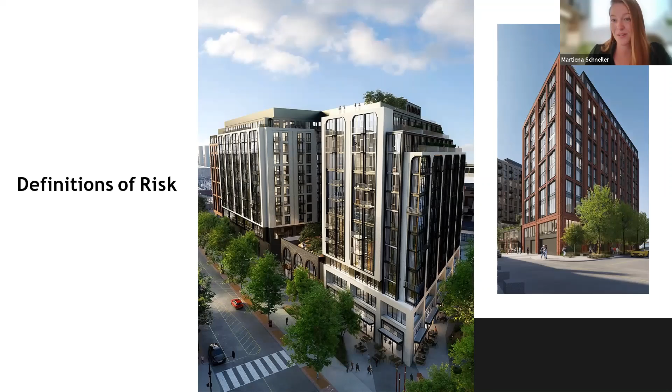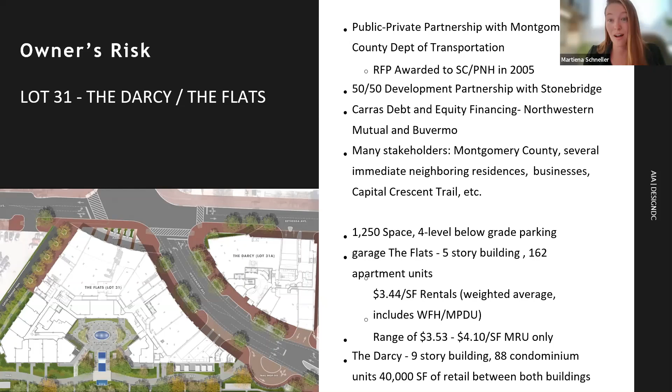So risk. Good developers learn to be risk conscious rather than risk averse. And it is not, there we go. Which brings us to Lot 31, which is the first project that I worked on when I came over to Hoffman and Associates. It was a public-private partnership with Montgomery County that was awarded to us in 2005 and went through design and looked a little bit different than what you know it as today, which ended up being the 1,200 space garage with the apartments and the condos. It was originally designed as a 250 unit condo building, which was going to serve as the gateway to Bethesda.

This all sounds great. We thought we were on top of it. Flash forward to when our designs were ready and we were about to bid, and what should happen? But the 2008 recession. We thought that it was not a great time to move forward with that many condos onto the market in 2008. So the overall decision between our joint venture was to put the project on hold and completely redesign. As you can imagine, this is more time, more risk coming into it, but no one was comfortable bringing that many units to the market.

So the big things that we looked at when we went back and revamped the project were getting rid of one of the condo buildings entirely. So we kept the Darcy, which turned into 88 condo units, and made the Flats 162 apartments. But that was the easy part of the redesign. There were also codes that were changing. Energy Star was coming online. Lighting design was changing. We spec'd lighting fixtures 6 times for this project. We thought that we were ahead of the game and had gotten the right package together with our compact fluorescents.

And we were joking earlier today, LED lights were just starting to become a thing. We stretched and scraped the budget just to get LED lights in the common spaces. So it's amazing how far the market has transitioned since that time.

Other things that we had to work on were our envelope. We had to redo the blower door test and rerun energy models. You can see some pictures here of construction. It was a very large hole that was very close to the neighborhood. There were a lot of eyes on it. We ended up breaking ground in 2012. So it was a hurry up and wait situation to get the drawings pulled together.

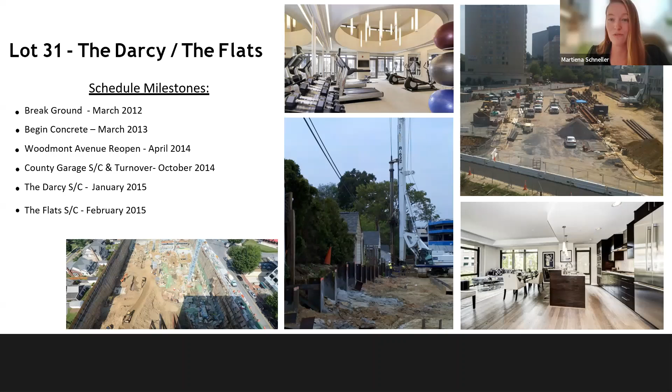And so when we had our GMP, it didn't include 4 massive addendums that were to come later, which included new updates to codes, including NFPA 285. Now, NFPA 285 wasn't new on the code books. It was just starting to be enforced. It'd come to the forefront of everyone's mind.

And so we went through a massive redesign on the exterior facade of this building to change the insulation from rigid to mineral wool, which changed the depth, changed our stud cavity and the thickness of the studs. And it was a pretty massive overall design change to the entire project.

This is us mid-construction, just as we were getting our substantial completions. And you can see the marketing sign says dramatically different. And I thought that that was a nice note to this, because where the project started to 10 years later, when it actually came online, it was dramatically different in all things.

So now that's my story from the development risk side. I'm going to turn it over to Adam so he can tell us a little bit about where the architect sees risk. Thank you, Martiena.

So one of the biggest risks that designers can face is having to redesign projects due to changing regulations or misinterpretation of current regulations that one is unfamiliar with. Clients and owners are often reluctant to pay costly add services related to code requirements, as they rely on us professionals to stay abreast of the latest rules.

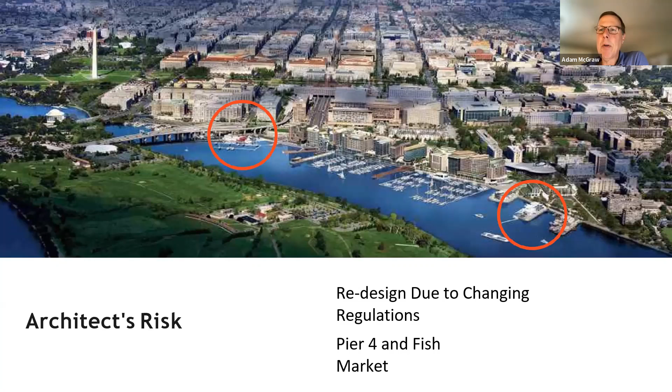So we're going to look at some case studies at the DC Wharf where we looked at mitigating environmental risk at both the Fish Market and Pier 4 projects. So next slide.

So while Hoffman had been working for years down at the wharf on phase 1, all of their new buildings had been located with their ground floors above the 100-year floodplain. And so they thus far avoided floodproofing design and the requirements for floodproofing barriers.

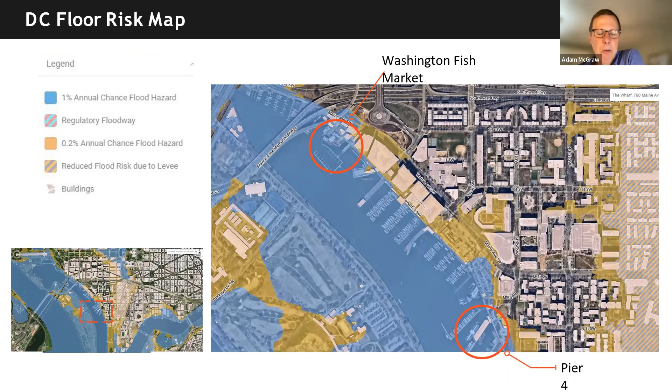When we began to design the Washington Fish Market and the Pier 4 projects, they were located on existing fixed sites that were within the 100-year floodplain, shown in blue here on this slide. So therefore, we knew we were going to have to familiarize ourselves with all the requirements of floodproofing regulations.

So again, we got to understand NFIP, which is the National Flood Insurance Program. It's required for all buildings located within floodplains, which also led us to need to understand FEMA guidelines, which show you how to achieve floodproofing certificates, which are again required for buildings which are going to be located in these areas.

We also had to get familiar with ASCE 24, which is the American Society of Civil Engineers, Chapter 24, which has design regulations and details for designing in these hazardous areas. And then all of these regulations in the city of Washington flow through the DC Department of Energy and Environment. So we met multiple times with DOEE to discuss our floodproofing designs and work with them to achieve approvable concepts.

We also reached out to manufacturers of flood barriers. And over on the right, you can see the left-hand barrier is what's called AquaFence, and the right-hand barrier is what's called Presray. And these are some of the major certified floodproofing barriers available on the market today.

And we needed to understand how those barriers worked early on, as early as the concept and schematic design. So we knew how they were going to work with our buildings and how we were going to need to incorporate those into our details.

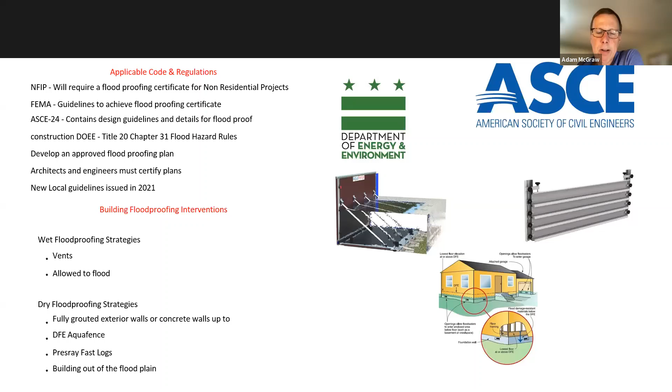During the course of the design of these two projects, DOEE issued a document called Climate Ready DC, which you can see highlights the dangers of rising tides and flooding to the Washington, DC area. I think everyone knows that over the past couple decades more and more attention has been paid to these flood events, including the 2006 Federal Triangle interior flood of DC, the 2011 flood of the Georgetown Harbor, where they actually had flood-proofing gates but did not put them up, which was quite the debacle. And then also the devastation that Hurricane Sandy brought to New York City, flooding the subway.

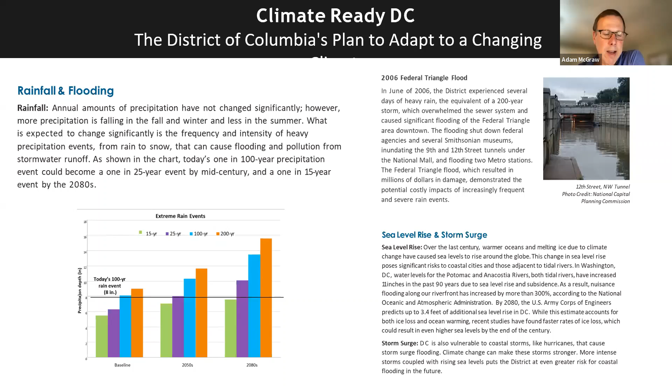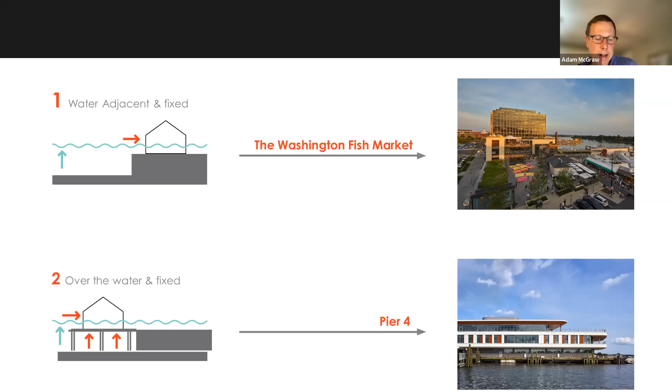Next slide. So these two projects presented unique, different flood-proofing challenges. The Washington Fish Market is located next to the water and on a large amount of fill. So it's subject to both lateral flood forces as well as moisture infiltration from below, whereas Pier 4 was projected out over top of the water and subject to lateral forces as well as hydrostatic pressure and uplift. Next slide.

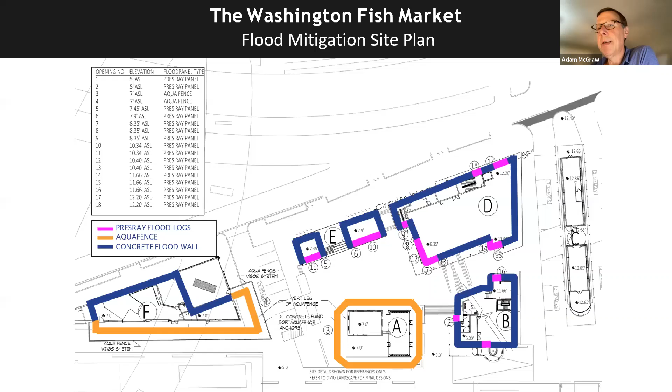So again, at the earliest phases of design, we were working with DOEE on developing floodproofing strategies that were mixtures of, in blue, floodproofing construction, which is fully grouted masonry walls, structures that are impervious to water. And then in yellow, what we're showing are AquaFence barriers, which you can put up when you have storefront or glazing on buildings, so you can protect around window and door openings. And then in purple, what are called Presray fast logs, which are adhered directly to the building, which can also protect openings. Next slide.

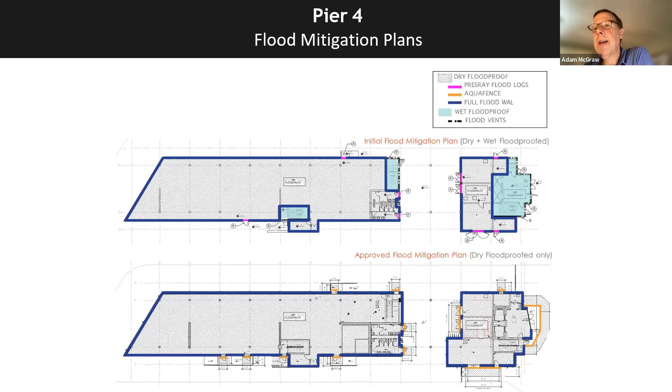And here are our floodproofing plans that we worked on with DOEE for Pier 4. The above plan was one of our earlier drafts that we proposed. We had proposed what was called wet floodproofing, shown in light blue, which is allowing certain areas of the building to flood, while everything else was dry floodproofed, keeping the floodwaters out. At the end of the day, we went with all dry floodproofing to protect the entire building. DOEE felt like wet floodproofing, particularly the lobby, could lead to extensive repair costs.

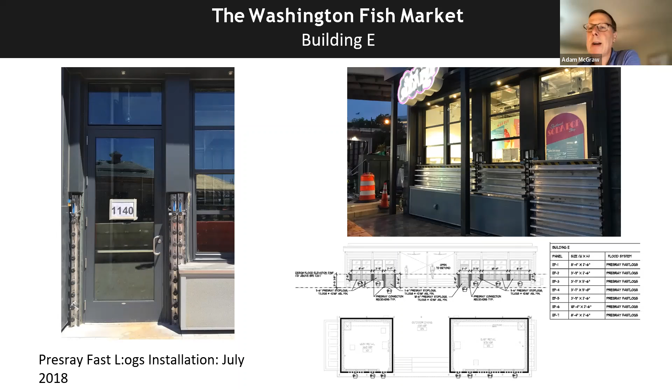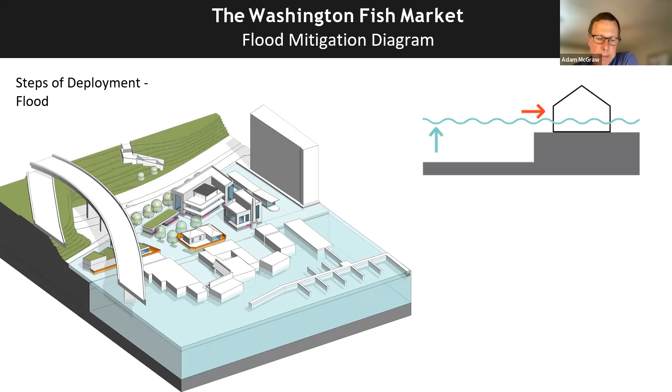So by the time we were engineering these systems and working with our structural, civil, and MEP engineers and developing our most expensive products, which were our permit and construction documents, we had floodproofing designs developed which were both workable and understood by the regulatory agencies, and which ended up being approved and built without extensive permit comments or any costly redesign. Great. So again, how to mitigate risk through working with regulatory agencies early on in the design process.

Which leads us to our last leg of the stool, which is the contractor's risk. So I leave it to you, Kyle, to walk us through Storey Park. All right, so the first thing you'll probably notice is I won't have nearly as many visuals, which is probably not surprising from a general contractor, non-design professional.

But for us, one of our biggest risks as a general contractor is getting the project started on time. There's a lot of risks once the project does start, but from a pre-construction standpoint, it's getting the project started, for a lot of the reasons Martiena talked about earlier: design issues, VE, permitting, code changes, financing. So for us, what's really important is to work collaboratively through pre-con to make sure jobs not only start on time, but also happen.

So a project I want to talk about is Storey Park. This project has been around for a long time. I actually started working on it when I worked for a different general contractor in 2012 when it was a residential and office building. But the way it finally ended up was 500 residential units, 235 key Marriotts, 40,000 feet of retail, and about 275 spaces below grade. Also having the loading dock below grade, and then it's pushed up right against the tracks there for WMATA, CSX, and Amtrak.

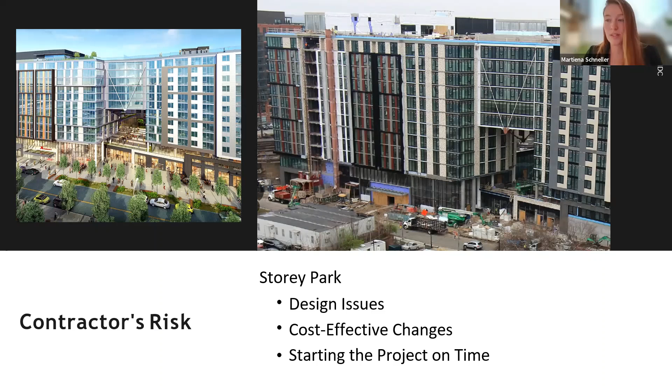Thanks for that. So that was where each of us come from the risk perspective. Now we're going to talk about how we have all joined up as a team for Parcel B to take what we have learned and use it to help us guide the project on a more straight line process. So each time Hoffman starts a project, we put out a list of our lessons learned to build upon them and to reduce our liability as the owners. So that means making good decisions on our side of the table, but also bringing in a team that ensures we avoid other issues that we haven't necessarily seen.

Historically, VE has been one of the biggest issues and hurdles that we've been trying to overcome. And I was trying to explain it to someone the other day, it's like a bad diet. If I only eat donuts, I don't have enough time in the day to run on a treadmill to lose the weight that I want to lose on this diet. And that is how we've come to appreciate VE in our office. Typically there aren't enough easy elements that you can VE out of a job to get you back down to budget before you start getting into other items that open us up to exposures for delays, massive miscoordination efforts, and a compromised vision that you don't want the building to end up in.

So Parcel B is the first one that we've really attacked. And while the architects and owners by themselves can be experts in their own rights, we wanted to make sure that we had a trusted GC engaged early on through the pre-con effort so that we could get early and often updates on pricing to understand where the market was driving and keep the design on a straight path instead of the tornado loop that we often find ourselves in as we go through the design process.

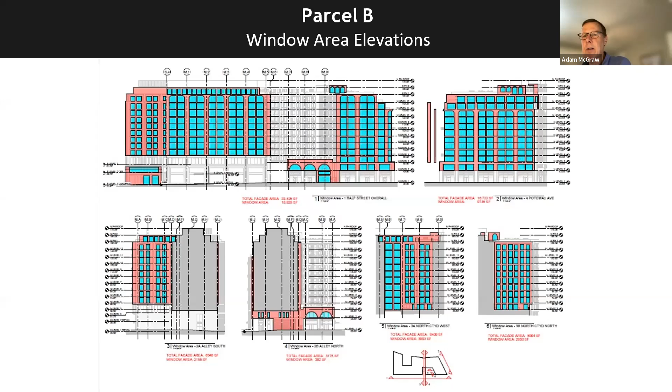And focusing the most glass on our most visible parts of the design, our best face forward. So those are our A facades, which you can see have the tall, slender gangs of windows with the curved tops. And then we worked with our secondary facades, and our third facades, which were the interiors of courtyards and places that were far less visible.

And so at the end of the day, we were able to achieve a design that was meeting those targets. As designers, we always get disappointed when our brilliant and beautiful designs get value engineered. So we were able to target the right percentages from the get-go, get designs that we were excited about, that the owner was excited about, that we developed with them, and through an entitlements process as well, were designs that were pleasing to the community, as well as the DC regulatory agencies.

So it was a really helpful exercise. And again, we anticipate that these glazing percentages now will not change as we move through the rest of the project, because we've started out in the right place.

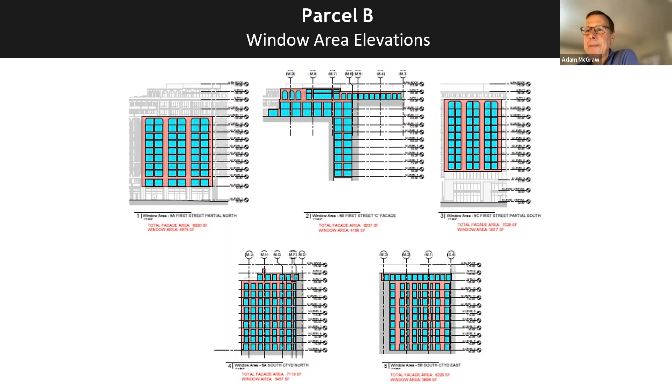The other thing Kyle touched on was mechanical systems. So while the VRF and water source heat pumps and those choices don't seem like they're going to be big design choices early on, we tackled them head on at our concept and SD phases. Our earliest narratives from our MEP engineers did spec water source heat pumps. As Kyle was indicating, that was really the way the market was going at the time that this project started.

However, their experience at Storey Park led them to push us towards the VRF solutions. Again, VRF becoming more energy efficient. So it wasn't a question of using something less efficient, but the big thing that we had to be wary of is if we were going to go with a VRF system, we did keep some water source heat pumps.

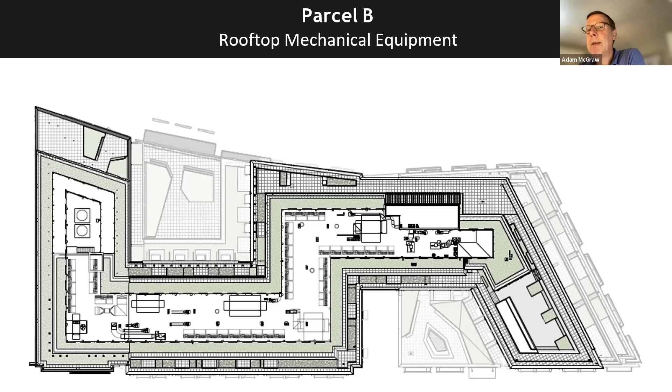You can see there's a small cooling tower on the far left. But we were going to have to deal with a lot more stormwater if we weren't using all water source heat pumps. So knowing that early on is really important, because as we get to our garage design, and here you can see this is a garage design that was early in schematic, we were able to plan for the greatly increased size cistern that was going to be needed to handle that stormwater.

So, you can imagine, here we're showing a cistern that we were able to figure out how to fit under the drive ramp down in the parking garage. But you can imagine trying to find a cistern this size during the 50% CD phase, or even at the IFC. It would be a huge change, and the owner would be getting really frustrated with the amount of parking spaces we would probably lose and the amount of redesign down there.

So making that decision at the earliest levels of design was really helpful. And again, it helped us without having to redo all the stormwater regs, which are complicated to redo, as they often get worked out earlier in the permitting process as well.

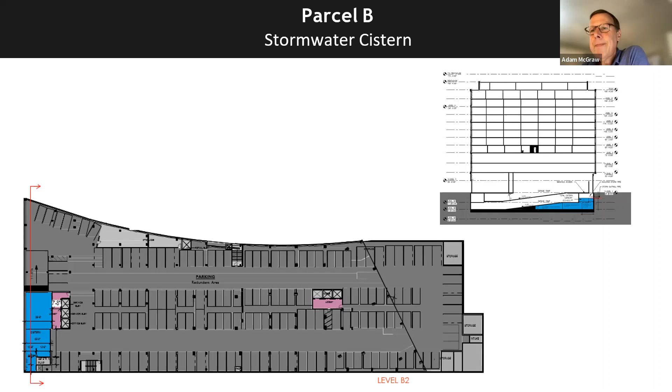And then our final one, we debated whether or not to put this in, but I really pushed for it because of my lesson learned from lot 31, where we had to go back and change all of the metal stud sizing on the exterior facade. But we did talk early about demising partitions, as silly as that sounds, for both interior and on the facade. And Kyle, I'll let you talk a little bit more about that and the volatility of the market and how that's playing into some of the decision making these days.

Yeah, this one might seem from left field, like it's not that important. And I see at least one other attendee who I know we've had this exact same conversation with on a project that we're working on the GMP for right now. But we try to get aligned on the partition types, both for the interior partitions and the exterior. And the reason that's important, one, for the exterior, a lot of that ultimately affects the energy model. So getting that right from the beginning works for us.

But for us, what we saw, basically from March 1st of last year to March 1st of this year, the drywall subcontractor pricing increased by about 35% plus or minus. And we really got into the weeds of what is driving that. And what we found was 85% of that increase was based on perimeter framing, exterior light gauge steel studs, and then the typical everyday unit demising partition studs. So doing the 3 5/8 or 4-inch versus a 6-inch stud is not necessarily just an architectural and energy model concern, it's also a cost concern.

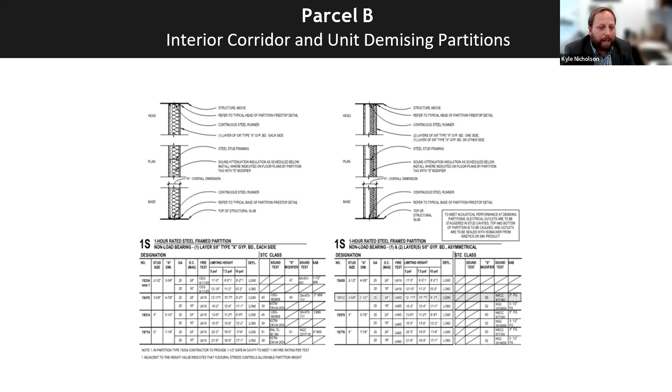So we just try to take all these lessons learned and things that people aren't thinking about and say, hey, wait, let's be smart about this. And maybe the partition we like isn't the one you end up using, but at least we have the conversation early, and then we're unified as a team to avoid the issue down the road. And we've already had the conversation.

Yeah, and as designers, it's great to have this kind of feedback early, because you can bake it into your building and your design, and again avoid just that ripple effect later on of having to change the ADA clearances and unit layouts over hundreds of units for 12 stories tall.

And then particularly when you're looking at the exterior envelope, if you changed from 6-inch studs to 3 5/8, again, to try and achieve value at the GMP level, you've got to rerun your energy models. You've got to redo a lot of stuff, which takes time and costs money and starts to eat away at the savings you're trying to achieve. So, when JMA brings these ideas to the table early, it's really helpful to have them to work with and, again, build those in at earlier levels of design.

And it's not to say that we don't have a hard conversation about it, because I, for one, am a big proponent of the double stud on interior walls. So it took a lot of convincing and conversation to go back and forth, but it just shows how collaborative our team has been really on a biweekly basis as we're going back and forth on these things. So it's been a really great experience.

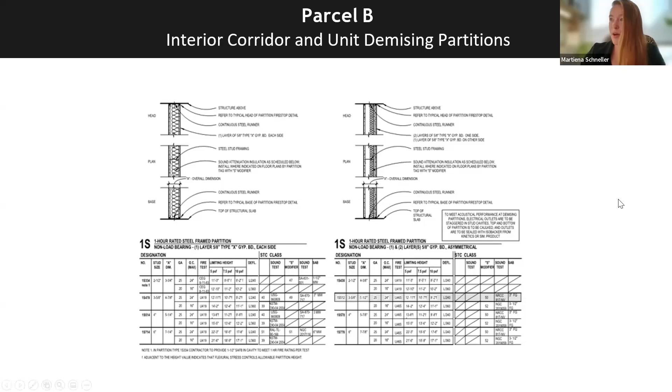Okay, so we're moving into the last phase of the presentation now, where we're going to talk about future risk mitigation. And we don't have a crystal ball, but where DC Energy Code could move to, net zero, LEED Platinum. I spoke a little bit earlier about how we had to redesign Lot 31. Our LEED certification completely changed in that when we jumped models. I think there's going to be a lot of that coming in the future. And then just resiliency and climate change and how that all factors into design. So Kyle, if you could kick us off by looking into your crystal ball to give us what you think is coming down the line for DC's energy code and construction changes.

Yeah, so this is an extremely relevant topic, and I feel like just in the last probably 2 months, or really since the beginning of the year, we've really started talking about the DC Energy Code and the future of energy code with the designers and our developer partners. And the thing is really the BEPS program, and what are the requirements going to be on the next cycle as far as energy performance, and then what the penalties are going to be.

And we wouldn't claim to be experts on that, but we talk with our consultants, sustainability consultants, design partners, and the answer right now seems to be no one knows. That standard hasn't been published, because they're going to rerun kind of based on the average buildings and then spit out a new number. But talking to some of our consultants, what they're saying is potentially a building that we build today that's LEED Platinum may not meet the minimum requirements for the next cycle of the BEPS program.

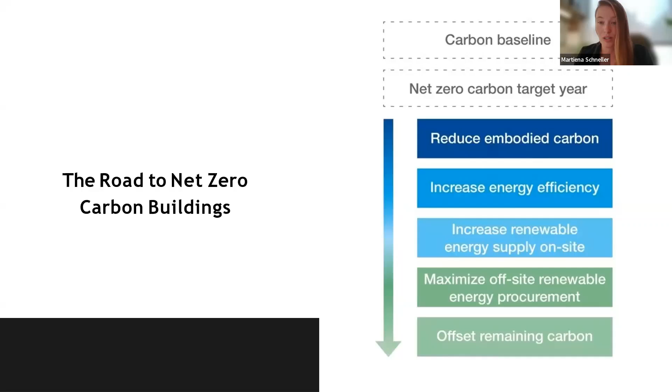So we're really trying to get creative with additional square footage and new and exciting ways to bend the technology and have it work for us in multiple ways, such that, as Kyle mentioned, we want to include these things, but we are still looking to make money at the end of the day. So we need to be cost conscious about how and where we're including the new technologies.

So I think that DC has done a good job of staying competitive, but it's certainly something else that we need to keep pushing, given the fact that 2008 was when most of the campaign for consumers of Energy Star products were really starting to hit the market. We've seen exponential growth, and hopefully we'll see that continue to trend.

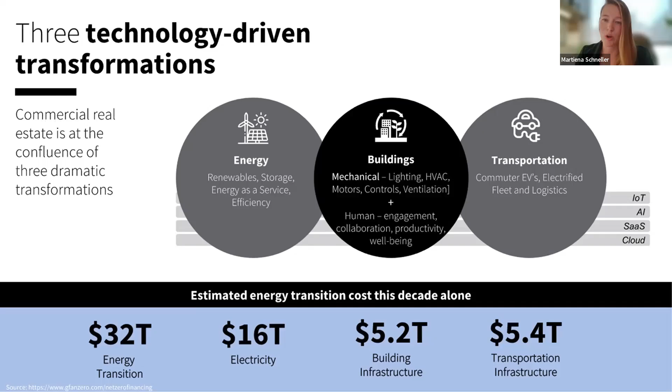And so I don't know about all of you folks, but we're definitely starting to get more questions about ESG and how our company is updating and modifying from not only our end users, but also our financial investors. Everyone is starting to align on the common path of how we can move forward in creative ways that will help reduce carbon footprints and increase efficiency to meet all of the new guidelines that are coming out, as well as risk and resiliency from climate, which I think Adam might have a few words to speak about, given that he is our resident expert on the rising waters of DC.

Well, just given our experience at the Wharf, and again looking around the city, and with emphasis on biophilic design and people wanting to live near natural views and waterfront, and that's a trend nationwide. We've been focusing on energy design, but the regulations around resilient design go hand in hand.